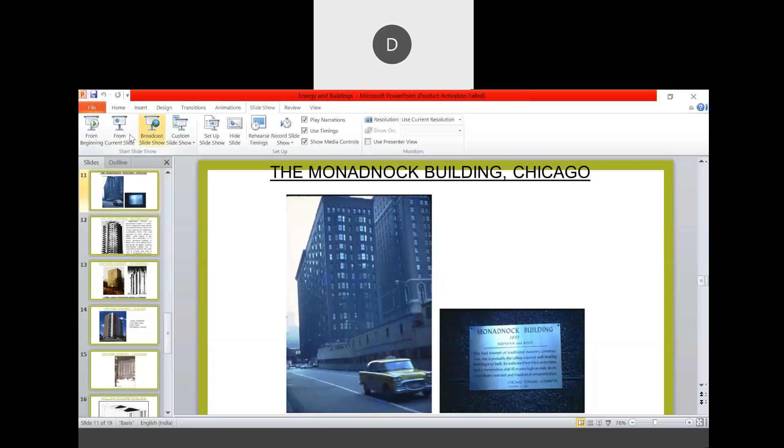Sir, I'm going to share the presentation for Sir. Please, yeah, I'm going to share it. Yes, ma'am, I have given you the presenting options. You can present these. Yes, sir. Okay, yeah. Yes, sir, at this time. Anyways.

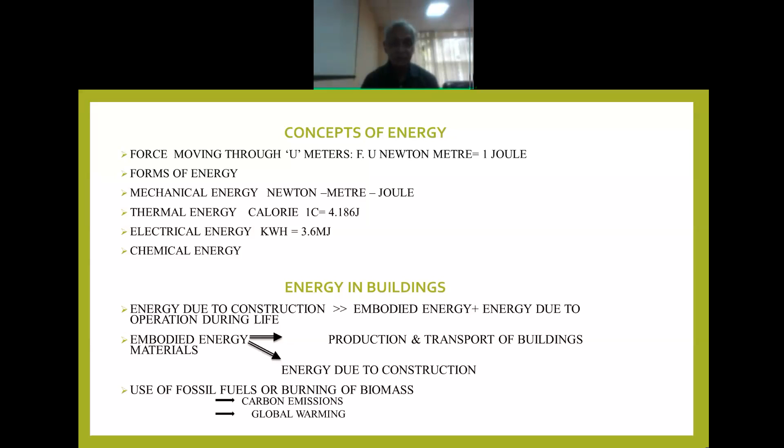So far we never bothered about energy in buildings, but now we find that our buildings contribute to global warming. So we should try to find out how much energy we are consuming and how to reduce it. Now let us look at the carbon emissions from various countries. The worst culprit today is China.

You can see in this figure that in 2005, it produced 5,667 metric tons of carbon dioxide. In 2015, it produced 10,000 and odd tons of carbon dioxide. It is the top today in the world. In 2005, the US was first, slightly more than China. India was fourth. Russia was third in 2005.

But in 2015, India has moved to the third position, emitting about 2,400 million tons of carbon dioxide every year. Now, we are a poor country, 1.3 billion people. How is it that we are consuming so much energy?

But if you look at the fact, in spite of this population, let us say 10% of India, who are probably relatively well off, are consuming a lot of energy. 10% of India is comparable in population to Japan. So half the carbon emission we are producing is coming from the small number of rich people in this country.

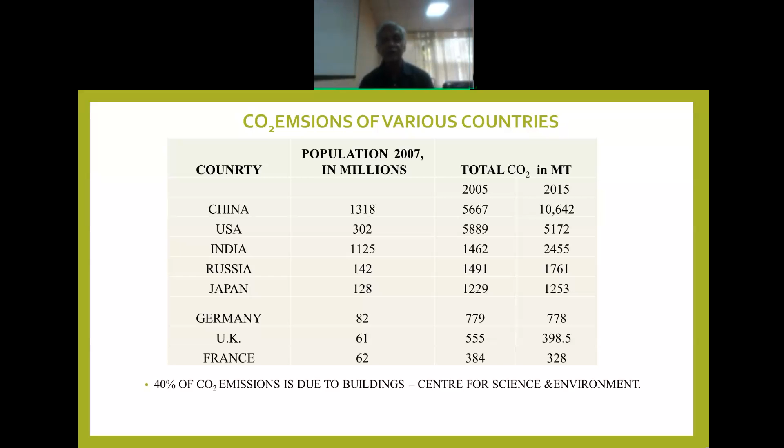And 40% of the national carbon emission comes from buildings, according to the report from the Centre for Science and Environment. So this is a significant contribution to global warming. So we should calculate how much energy we are consuming, how much carbon dioxide each building is emitting. To understand the issues in energy, we will look at the energy due to fuels.

Firewood is a well-known fuel that has been used since ancient times. 1 kilogram of firewood makes 15 to 17 megajoules of energy. Coal has slightly more, 19.98. This is inferior variety coal. Good quality coal will have 25 megajoules. Charcoal is a very good fuel, 25 megajoules per kg.

Rice husk is also a fuel. Very often people use rice husk for burning bricks, 13.4 megajoules per kg. Diesel, 38.7 megajoules per liter. It is one of the high energy intensity. Lignite, which is an inferior form of coal, is 16.33 megajoules per kg. With this information, when you calculate the amount of fuel used for any activity of building construction, you can estimate the megajoules of energy of that particular building material.

This is all about fuels, but electricity is on a different footing. Energy calculation due to electricity depends on the source of electricity. If the source of electricity is hydroelectric, you are in a very fortunate situation because 1 kilowatt hour is only 3.6. But unfortunately, nearly 70% of our energy comes from thermal source, because hydroelectric energy is not enough looking at our demand for energy. To meet all the requirements, you have to produce energy by burning coal.

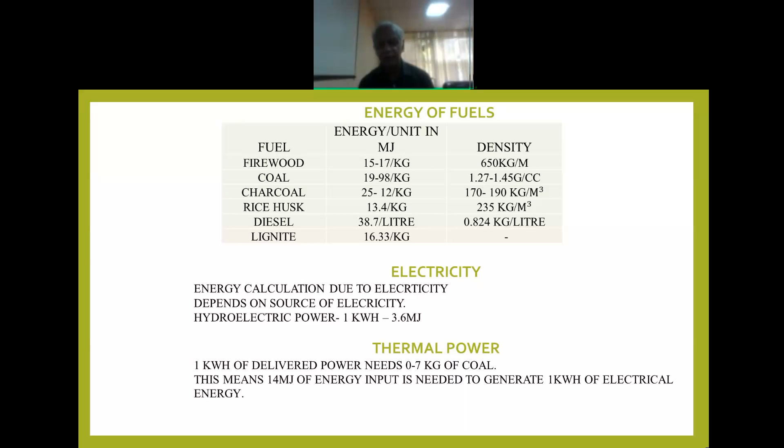So let us look at the embodied energy of building materials. I've listed some of the typical building materials. One brick, which weighs 3 kilograms, requires about 0.3 kilograms of firewood or 0.2 kilograms of coal, which means 4.63 to 5.6 megajoules of energy. Cement is also a high energy material, 3 to 3.6 megajoules. Today, they are making a lot of efficiency in cement production using the dry process instead of the wet process. In spite of that, there is so much energy.

Lime is produced in small kilns, so it is more inefficient, 6.2 to 8.1 megajoules. Lime plus fly ash. See, fly ash is a byproduct. There is no energy for fly ash. It is obtained as a byproduct of powdered coal burning, and this has very good properties. When you mix lime and fly ash, the energy comes down to 2.08 to 2.6. So lime plus fly ash is a very good alternative.

Steel is one of the major culprits. It consumes 28.8 megajoules. Aluminum is even worse, 236.8. Glass also consumes energy. Even sand, if you transport it 100 kilometers, 1 meter cube will consume 154 megajoules. Coarse aggregate, you produce by crushing granite, 111 megajoules. Marble, you get from Rajasthan. Because of transport, marble is 200 megajoules per meter. People have a great fancy for using marble in luxury buildings and five-star hotels. This means there is so much energy and so much carbon.

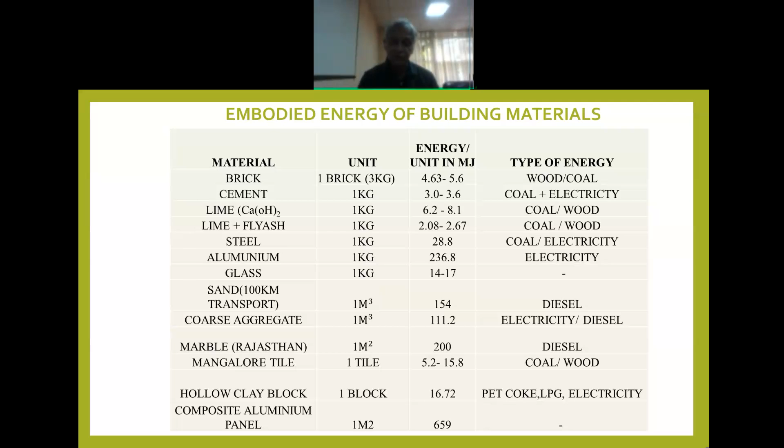Composite aluminum panel. People are very fond of using exterior composite aluminum panels. For 1 meter square, it consumes 659 megajoules. So these are some of the luxury items which are very highly energy intensive. If you want to reduce energy in buildings, you should try to cut down on the use of such expensive material.

Now, what do we do for alternatives? I gave you examples of so many building materials which are expensive. Can we replace them by alternatives which consume less energy? Let us look at one issue, the building block. Building blocks are very important. The bulk of the volume of a building is consumed in the blocks used in the wall.

We have the brick. I have given the sizes of different blocks. Each block has a different size. You take stabilized mud block, which is 2.5 times the brick in size. Hollow concrete block is about 5 to 6 times the size of the brick. The energy of all these varies, but when you compare the energy for brick equivalent, same volume, stabilized mud block consumes less than 1/4 the energy.

Hollow concrete blocks also less than 1/4. Hollow clay block is about half, less than half. Cut sandstone: you go to Kutch area, in Bhuj, there sandstone is cut through an electrical device, and that cut sandstone, in spite of using electricity, has a very low energy. Very little electricity is used, and you will get a block which consumes less than 1/4 the energy.

So we now have 4 alternatives. This means you should not use brick anymore. You want to reduce energy and carbon emission. Carbon emission also comes down significantly when you switch over from brick to these alternatives. So there are 4 alternatives. We should switch over to one of these alternatives.

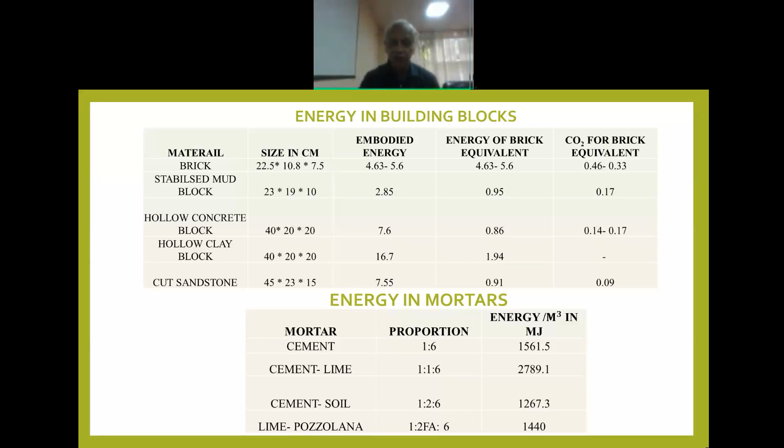Now the other issue is we look at wall elements. Wall elements means masonry. Masonry unit: burnt brick is the basic material, cement mortar 1:6. So per cubic meter of masonry, the energy is 2630 megajoules. Same if you stabilize mud block with 8% cement in cement soil mortar 1:2:6, the energy is 730. Almost 25% of the energy of the burnt brick masonry. So again, it is a very nice example of how you can save energy and reduce carbon emission.

Hollow concrete block is also a good option, and it has slightly more energy, 863, still very much less than brick masonry. Hollow clay block is about half the energy of the brick masonry. Even that is better than brick masonry. The advantage of hollow clay block is the density is very low, often around 1000 kilograms per meter cube. And because of reduced weight, you can build higher stories.

Stone masonry has the lowest energy because stone is extracted by simple manual labor. There is not much fuel energy spent. So its energy is also low. The problem is it is very expensive to manually process. Solid concrete block masonry has slightly greater energy because it is solid concrete. There is more material there. Hollow concrete saves material and is lesser weight. Solid concrete is heavier and also consumes more.

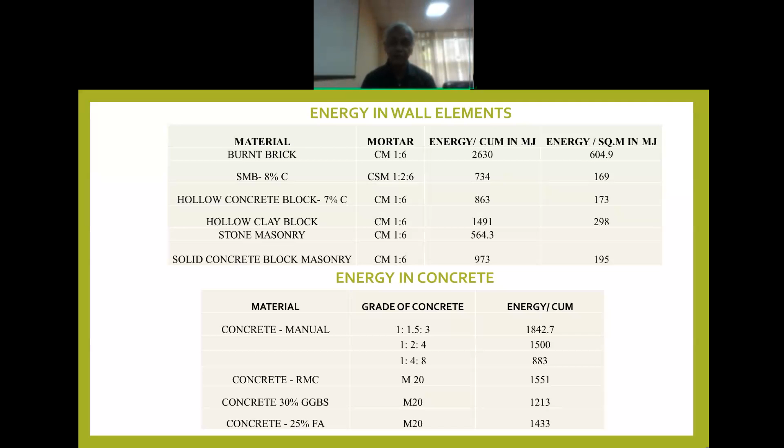If you have 1:2:4 or 1:4:8, the energy again comes down. Foundations you can manage with 1:4:8. That energy saving will be quite significant. RMC is becoming increasingly popular. RMC has less energy because they use additives, both fly ash and GGBS. And when you use only GGBS as the additive, concrete has about 2/3 of the energy of manual concrete. Concrete with fly ash is also less. So even in concrete, look at alternatives which can reduce the energy.

Let us also look at roof elements. This reinforced concrete slab, which is normally very popular, is about 546.4 megajoules per square meter. We have what is known as the filler slab. The filler slab, I'll show you the examples day after tomorrow. Replace the bottom portion of the concrete slab periodically by an alternative material, which has less energy and is cheaper.

And the filler slab, stabilized mud block filler, 418.2. Brick slab. Very often, to do very fast construction, people use a steel decking and pour concrete directly over the steel decking. The advantage is there is no formwork problem. But this energy is more because of the steel. Mangalore tile roof also consumes reasonable energy. It is on wooden support. If you use steel support, the energy is much more than everything.

Lastly, let us look at building technologies as a whole. If you want to produce a building, there are varieties of technologies. I have listed the 4 technologies here. First is 8-story RC frame brick infill. See, frame technology, high-rise technology is very popular because of the land price going up. People prefer to build high-rise buildings, and as the height is increased and as you use more and more brick, 1 meter square of building plan area consumes 4.2 gigajoules of energy. Its carbon emission is 0.41 ton per square meter.

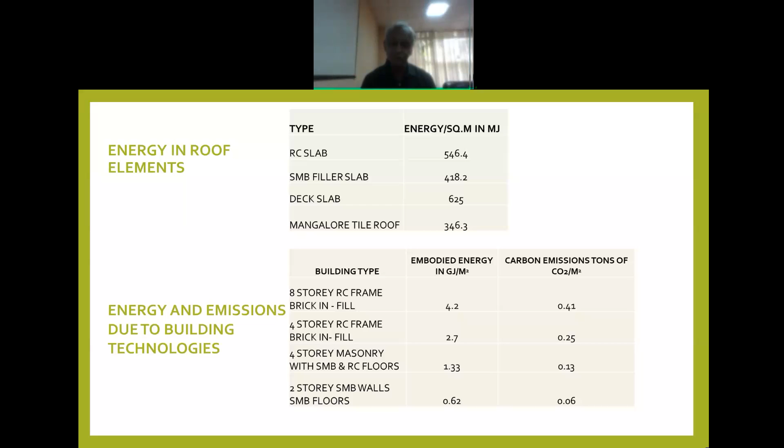This is operation energy; I spent some time on operation energy. When you want to look at life cycle energy, embodied energy should be added to operation energy plus energy during demolition. Supposing you take a 50-year lifetime, one could look at the entire energy life cycle. Operation energy is cumulative. Embodied energy happens just once in the beginning, a little bit during maintenance and repairs. But the bulk of the energy comes in the form of operation energy.

And we studied various houses in Mysore and Bangalore. Based on the income per capita per month and the area of the building, we found the kilowatt hours of energy consumption per year. In the case of a building with an income of 5,000 rupees per capita per month, it is 222 kilowatt hours of energy per year. Go to higher income, 25,000, 3 times more energy is consumed. Because people with higher income will have more electrical gadgets, fans, a refrigerator, a microwave oven, what have you. So energy consumption goes up.

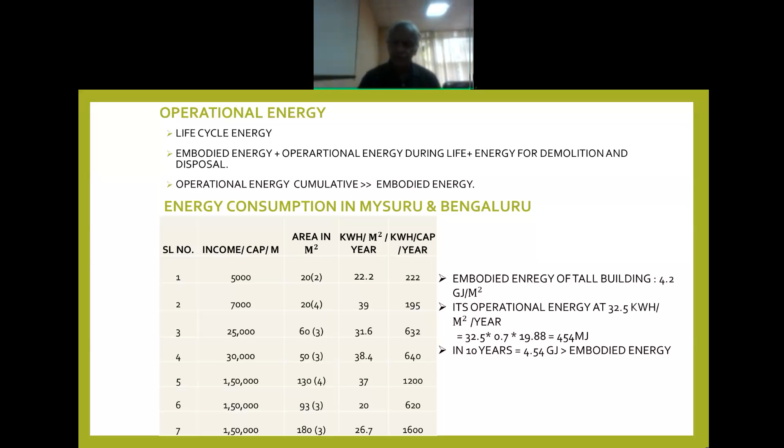But now let us look at, I said that you have to use masonry and not frame construction. I know many civil engineers will look surprised at my statement, because you go and talk to any contractor and civil engineer, if you want to build a building more than 1 story, they will say we will put up concrete and consume a lot of space. But let us look at what's happening all over the world. Examples of high-rise masonry. Can we build high-rise masonry? Possible.

This is a very interesting example. 19th century. In the 19th century, I don't think reinforced concrete was available. The only structural material was masonry. And these enterprising Americans wanted to build a skyscraper, about 16 stories or so. So they said, let us build out of masonry. Their knowledge of masonry was limited, but they used 6 foot thick walls in the ground floor because they didn't know how to calculate the strength of masonry. They wanted to play it safe.

So this building was built in the 19th century, a skyscraper using masonry. Of course, they had problems because of settlement, because the weight of the building was so enormous. But it shows the possibilities of masonry.

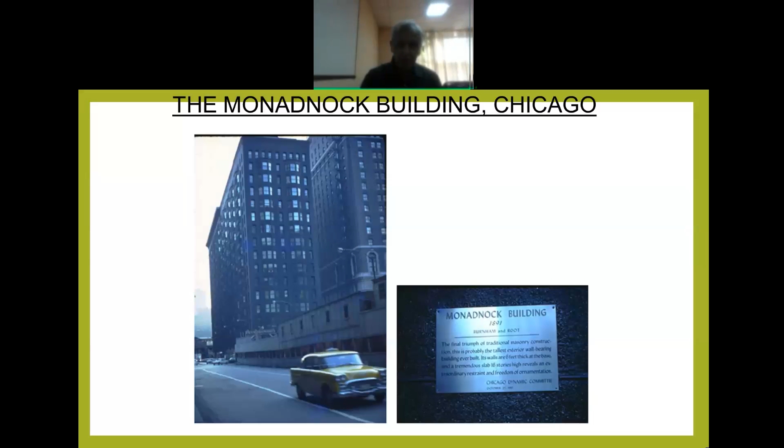But let us look at Switzerland. Switzerland has no steel industry. So if they want to build high rise, they have to import steel. But they had a brick technology where their bricks reach 70 MPa; they are better than your concrete. They found that, and their knowledge of masonry also improved in this period of time.

Masonry research picked up in the 40s, especially in Europe, and they have built an 18-story load-bearing masonry building, wall thickness 127 to 245, in Switzerland. So if the strength of the block is good, you can build high rise. And Switzerland has no fear of earthquakes also. So they have happily built high rise masonry.

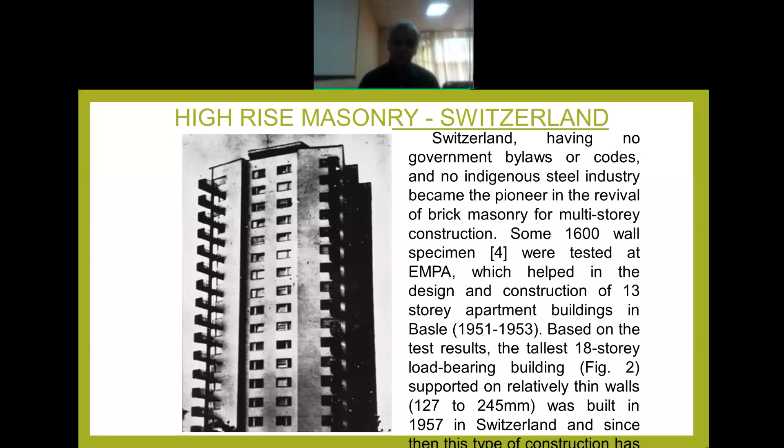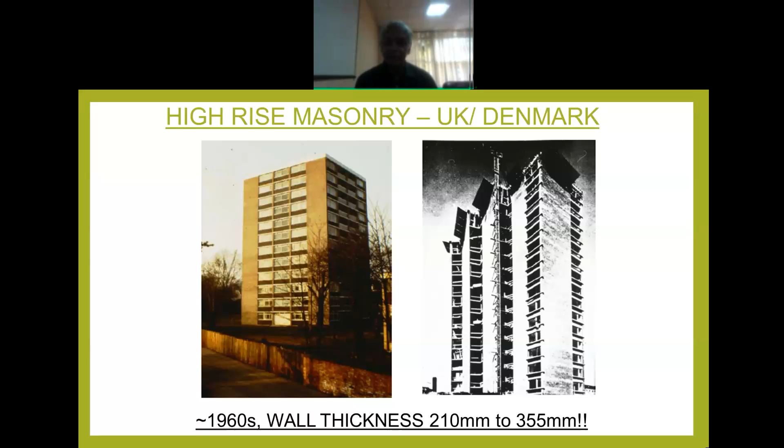Not only Switzerland, you get UK, Denmark. Denmark also doesn't have a steel industry. It's such a small country. But they know how to produce high strength bricks. And with wall thickness of 210 to 355 millimeters, they build high rise. Not merely Europe, come to Chicago. In the 1960s, they built a high rise building, I think 14 or 16 stories. Wall thickness 305 mm.

The advantage in American practice is they can use hollow concrete blocks. With hollow concrete blocks, if you want to reinforce against earthquakes, you can introduce a rod in some of these hollows and grout that hollow. So you can introduce reinforcement very conveniently in the wall. And the hollow concrete block, because the dead weight is less, facilitates building high rise. This they have discovered.

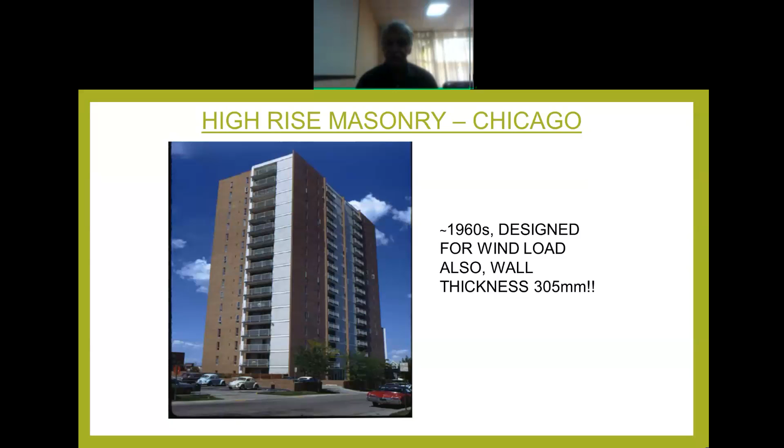America, where labor cost is high, has found advantages to use this instead of reinforced concrete - for example, a 14-story building in Cleveland. This is from a textbook on masonry by Mr. Narendra Taly, an Indian settled in the US, who has written a book on masonry. This photograph is from that book. He talks of high-rise masonry using hollow concrete blocks. So Western countries are doing high-rise masonry.

In our country, even for 2 stories, people want to use reinforced concrete frame because the contractor gets more profit. I think engineers are doing a disservice to our society by thinking only of this. We civil engineers have become very blind. We do not think afresh or look at facts carefully.

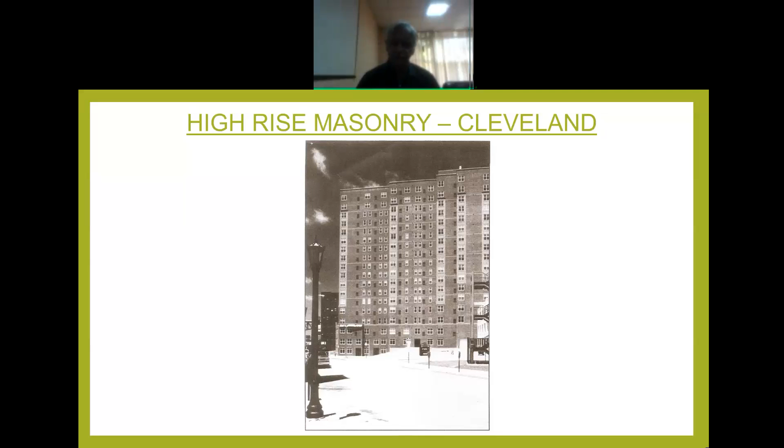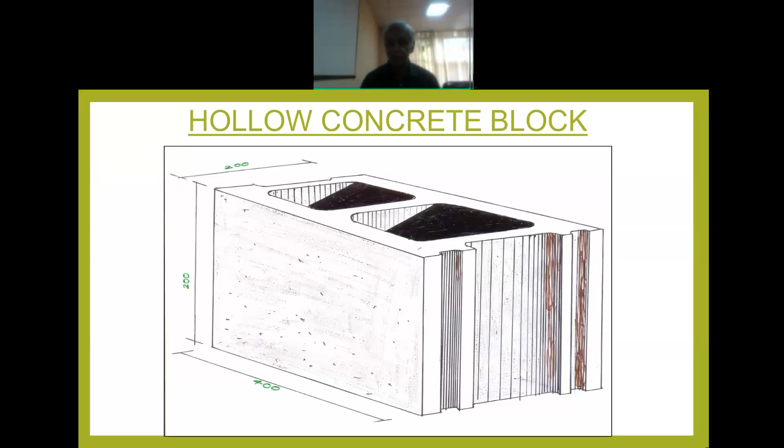And it has already been done in India, although in other parts of India, people still believe in reinforced concrete frame. Look at what was done by an engineer named Ganesh Kamath in Mumbai. He built hollow concrete block masonry like this. Once in a way, he introduces a rod and grouts that hole. Rest of the holes you don't provide steel - only once in a way, some distance apart. That is good enough to take care of earthquake loads.

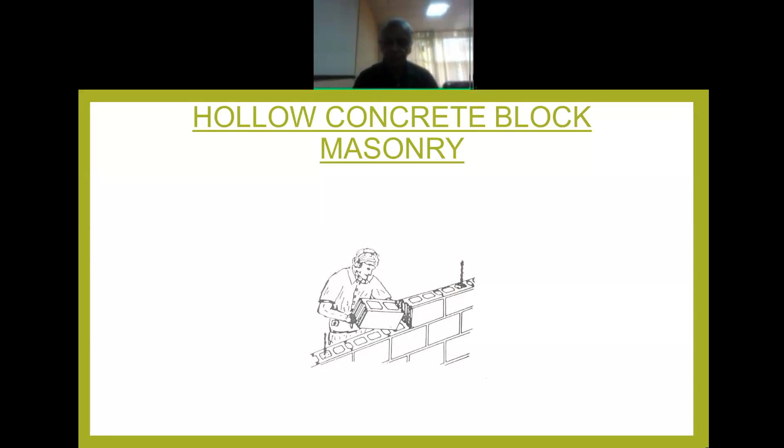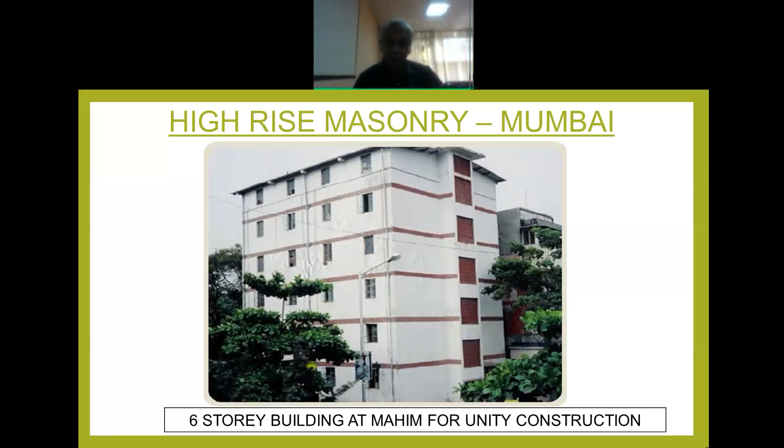This is a 6-story load-bearing masonry building in Mahim. So it has all been done in India - hollow concrete block load-bearing masonry. A 9-story hotel in Nashik, hollow concrete block. This photograph was sent to me by Mr. Ganesh Kamath, who has pioneered the use of high-rise masonry, but I don't think our engineers have learned the lesson.

They don't care because their profits are most important. If the country saves energy and improves global warming, they don't care. That is the unfortunate situation in our country. I feel we should move towards load-bearing masonry, at least up to 10 stories. More than 10 stories, although the Western example is there, you can think of reinforced concrete.

But another point I'd like to emphasize - I'm told there are 1 lakh apartments in Bangalore which are vacant. If people build high rises, it's a matter of speculation, the hope that the market will take it up. But unfortunately, most of these high rises are so expensive that there are not enough crorepatis to occupy these houses.

So what is happening is you're building material - I'm told there are 7 lakh apartments all over India which are vacant. This is a different kind of non-performing asset. You spend energy, you spend capital, and there are no returns. Engineers have to severely think about what's happening to our urban planning.

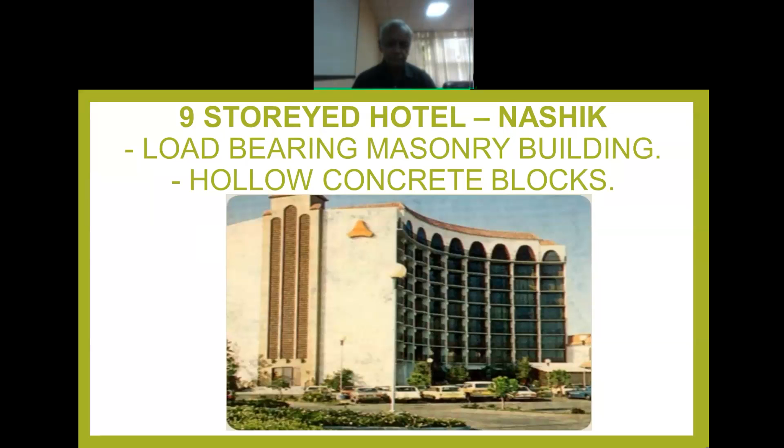Thank you so much, sir. Thank you for the presentation and also the way you have answered the questions. I think it goes by the reputation that you have. Thank you so much, sir.

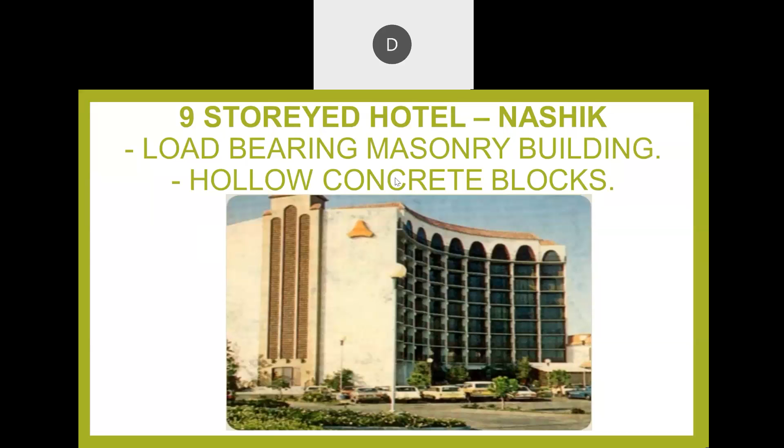Good afternoon. Sir, it was very, very lucid technical talk, and even a layman could understand. You have made us understand embodied energy and carbon emission in such a simple way that it will definitely motivate us and provoke us to explore further whenever we do practical work or consultancy, because many of our faculty are consulting engineers. Definitely, sir, this is helping us in reducing the carbon emission from the building blocks or wall panels used in construction.

An overall view of energy utilized by the materials which are being manufactured and used in constructions. So it was very good, and we have definitely learned a few lessons wherein we'll attempt to reduce carbon emission while maintaining strength and stability of the structure by utilizing alternative materials, as you said, combinations of cement and soil, cement and fly ash, and different coarse aggregates etc. So it was a very nice presentation, sir. Thank you so much for your efforts. We are very small to appreciate your talk, and you are such a big man.